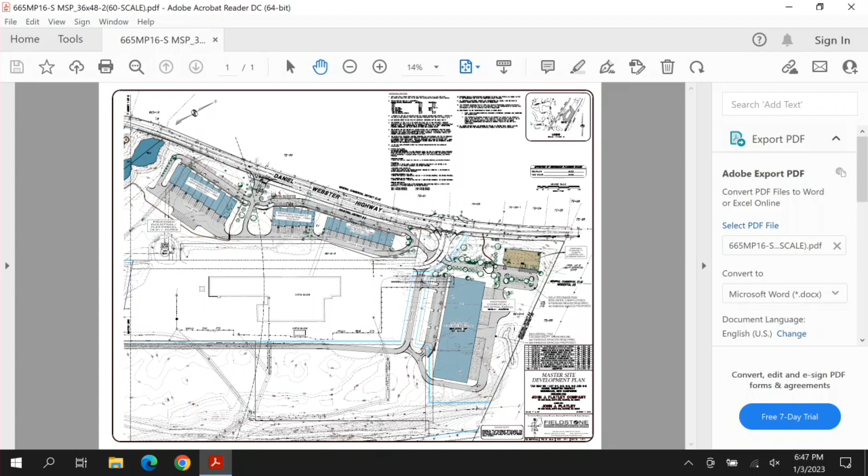You said he's comparing it to what was originally approved back in 2014, correct? Correct. So his new numbers, does that account for the extra apartment buildings that were placed? Yes. So there's slightly more apartments, but there's quite a bit less retail, and a drop off in industrial space. So what you're basically saying is that the increase in residential does not make up for the loss in commercial, traffic-wise. Right. Okay.

Mr. Chairman, I'm a little confused by the packet we were given, which talks about the big retail, and I got a little confused by what we were presented here. So what page are you looking at? Well, just this page for one. Gotcha.

So just from what I'm gathering there, that's just the overall—I hate to call it a secondary site—the second phase. You see Gilbert Drive right south of that. So the yellow portion right there is the phase 2 side of what we're looking at. So what would have been the retail, and I believe the high bay garages and light industrial, included in that parcel as well, correct?

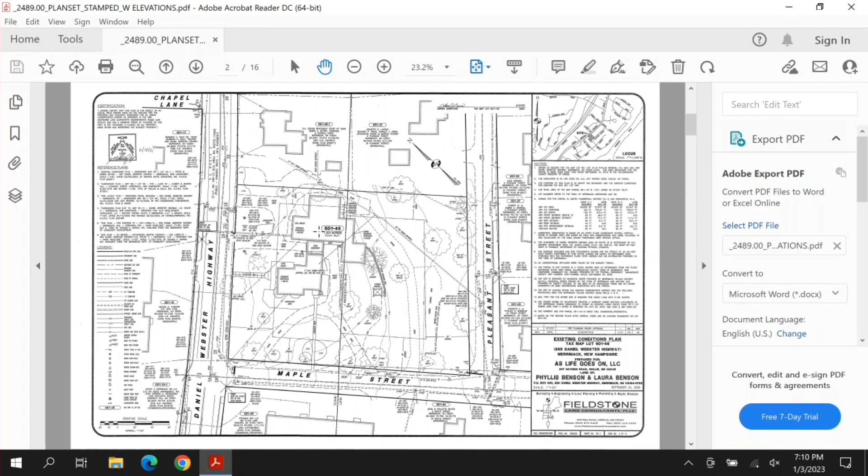So working out the existing elevations of this main building, the original building, and the elevator, and this new building, the elevations didn't work out, and the building was decrepit, so they found it more financially suitable to just raze this portion and build a new facility.

So that's just a demolition plan. This is what we're looking at here. You can see there's much more space along this, I guess, northeasterly boundary. And this little encroachment, because there's a zone line here, and the setbacks change when you get on this side of the zone line, so we have this little encroachment here.

So this is what would be reworked. We just step the building in to get out of that setback. So then the elevator tower is here in the middle where it always was, and there's actually a little atrium in the middle here. On the ground, this is open to the ground, and there's a catwalk that loops around, above grade. The rest of the site is pretty much the same.

There was a little rework to this driveway. This front parking lot is the same. The little loop drive where they used to have valet parking stays, and that's just for bringing an ambulance in to bring people in. But most of the activity's going to be happening over here, and this drive is just a service drive, and the dumpster's back here. There's a man door off the backside connected to this service drive that wasn't there before — there were doors there, but they weren't shown as connected with a walkway. There's a new walkway here that connects to the new building that wasn't there before.

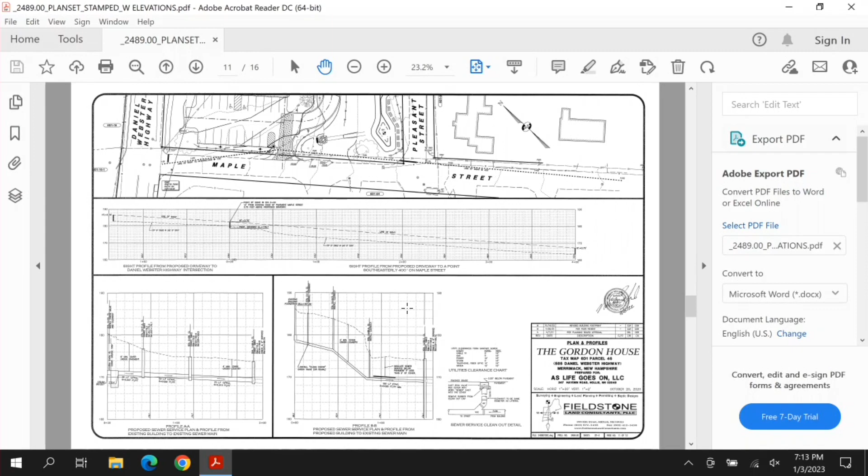We can skip down. I do have an elevation of the plan. Not to cut you off, Mr. Chamberlain, but could you return to the landscaping? Since you're razing that portion of the building that's currently encroaching on the next property, are you not going to replace any vegetation where the building once stood?

Well, that'll be all loamed and seeded. We can certainly add some plantings over there as well. I'm assuming you're going to make the new portion of the building look similar to the original, somewhat Victorian. Yeah, it'll be all clapboard. That's okay, continue.

We didn't get any pictures of what those look like in our packet. Do we not have any elevation? I thought there were some, let me find them. The elevations were submitted. I can flip to them here. We only have the elevation from the street. That's one of the comments, to include those with the plan set, which we certainly will do.

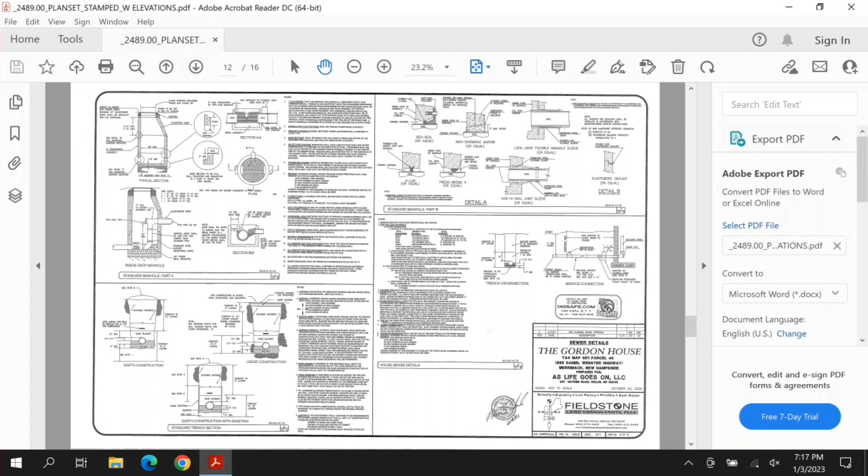Did you have a staff or break room? Yeah, over there, in the original building. Okay, gotcha. I mean, there's no bedrooms proposed in the original building.

Did you have to go through the Conservation Commission, the Historical Society, for any of this construction? I would assume so, since you're razing it. I don't think we've gone through that process yet.

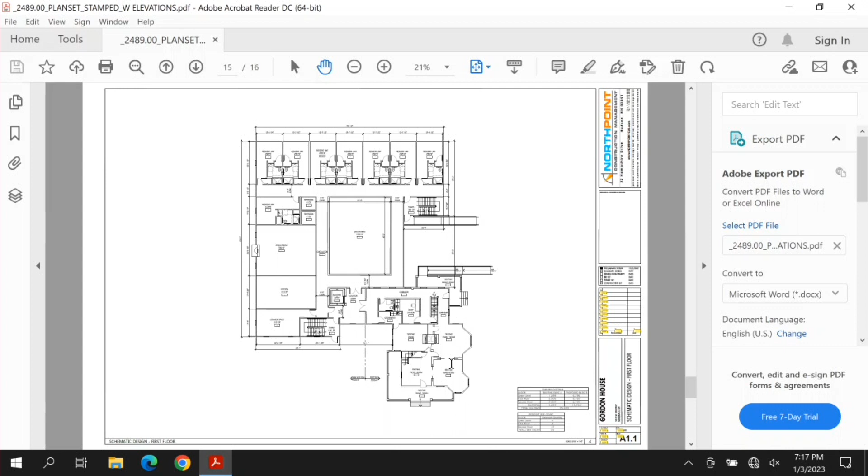So you'll be going to them after us? Yeah. Robert, is that how it usually goes? The Historical Society doesn't see it till we approve it. We don't have any requirements for that in Merrimack, so it's strictly voluntary. As a member of the Historical Commission, I didn't know that - the commission is supposed to be notified if a historical building is being razed in any part. They just have to notify you, and we like to see what they're actually going to do and what the plan is. I don't know what qualifies as historic, but that portion was built in the 70s.

I'm assuming the restaurant portion is relatively newer compared to the rest of the building. I'm surprised that's the portion you have to tear down, considering the house has been there for a while. I don't think it was maintained. Well, it's been sitting there for a long time, as long as I can remember.

So, Mr. Anketell, please. Miss Healy, so this is assisted living, so they're more or less independent with their ADLs, et cetera. And you don't have any staff desk, documentation area, et cetera, over in the part that's going to be rebuilt? It's all in the existing building? Correct, I mean there is some.

As a nurse, I find that very interesting - inconvenient, you might say. That too, my wife would say the same thing. I don't know a lot of detail about the building. They do have some common area with the new portion, but most of the operations are occurring in the old building. Well, I'm sure a lot of that's computerized now, at least at my wife's job. It's attached to the nursing cart anyways.

So the way the staff memo was written, we need a variance for this plan to move forward. And what we understood is we've talked to the owner, the applicant, and the architect, and they said they can modify the building, so a variance wouldn't be required. So I guess it's either-or - either we get a variance or we modify the building. You could approve this with the condition we get a variance, or that we modify the building.

Well, the part I don't care for is that modifying the building slightly affects the interior layout of the whole thing, and may require an extension somewhere else. So if you're here tonight to ask us for approval of this particular configuration, we can act on that, or we can do it with the condition suggested by staff. But I'm not ready to go to any approvals. Well, if you need to change it, we're okay with that, without seeing it. That's where I'm coming from.

I didn't get the visuals, just a quick look while it was up, then it's gone. So I don't know what this is going to look like - the architecturals, yeah, and I guess that looks pretty good. Is there a chimney on the north side there? Is that what I see sticking up? That's what it appears to be. That's it, whether it is or it isn't - it appears that way to me too, but is that what it is?

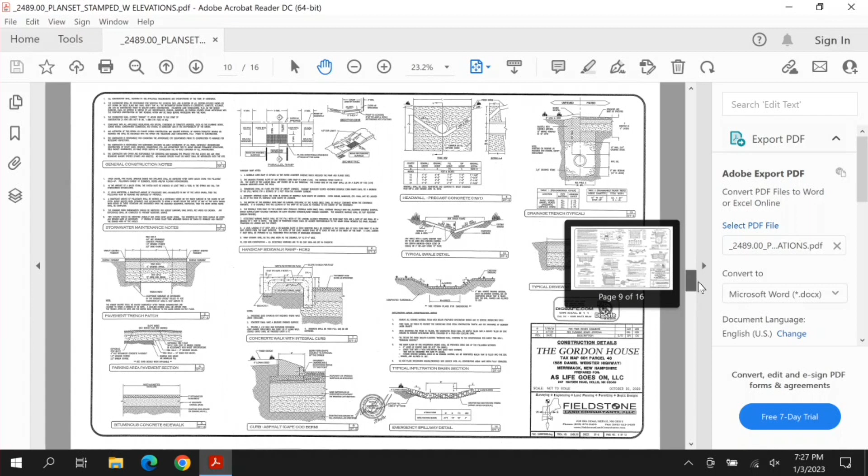Do you have a rendering of what it looks like? Correct, we don't have the rendering - I only have the rendering facing Daniel Webster. I apologize for that. I'm not sure why the architect didn't give us a rendering of each.

But yeah, so they're going to have to come and use that sidewalk in the front and bring them around. That's definitely something I will get clarification on. I almost think the horseshoe has no utility at that point. No, I agree.

Yeah, it seems like it wouldn't work. If I had an ambulance, you'd just pull up front. Unless you're going to use it for parking visitors or something. Yeah, it's already there. But if you made the barn door like a person loading dock, then it would make more sense.

I'm just not sure how it's gonna work, because the basement level is well below. You're coming in mid-level there, not more above, just do a mid-level scissor lift, you're coming in a little below. Get real industrial real quick, yeah.

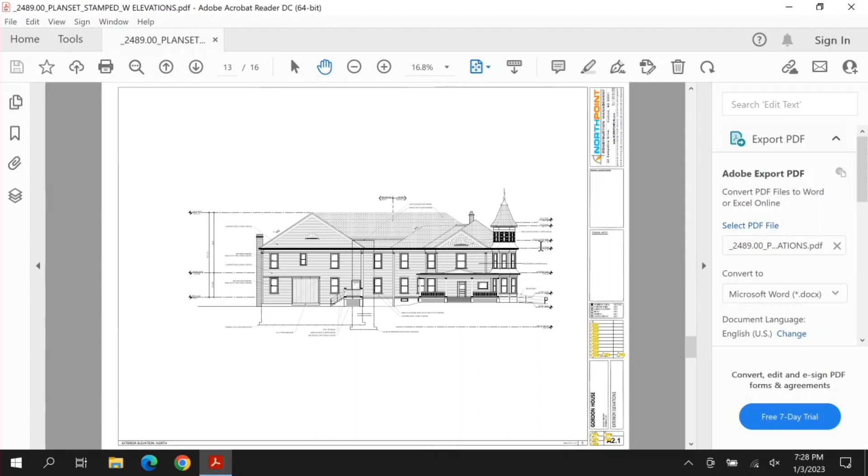A lot of people in assisted living bring some of their own furniture, so you'd need a space to be able to get through that door. Well, it doesn't look like that door will serve the purpose. I'm not sure how this works.

So offhand, I'd say, Mr. Chairman, that we need a little more detail on that whole thing, and whether or not - let me see - the site and the planting. Okay, I guess those were my main comments. Nelson, you make a good point, those are good points. I must have misunderstood that the setback - to me it looks like it changed, because at the back of the building you said you're going to have a notch. I did not notice that.

Robert, I'm assuming, like you said, that Tim worked on this one. Is there a reason he'd be okay with us pushing that forward without these even being the plans they're actually going to build? So because it's such a minor modification, you can conditionally approve it with the condition that the design be presented to staff, that that's acceptable to us. If the board does not feel comfortable with that approach and wants to see it again, to see the cutout and see everything, that is perfectly fine.

Okay, I think I'd like to see what it's gonna be before I say go ahead with it. I'd also like to see a rendering of more than one side as well - not to be a pain, but some measurements too. How big is this? Is that 40 feet? Is that 60 feet? I'm not sure if that's even our jurisdiction, but having that horseshoe not be functional just does not make sense to me.

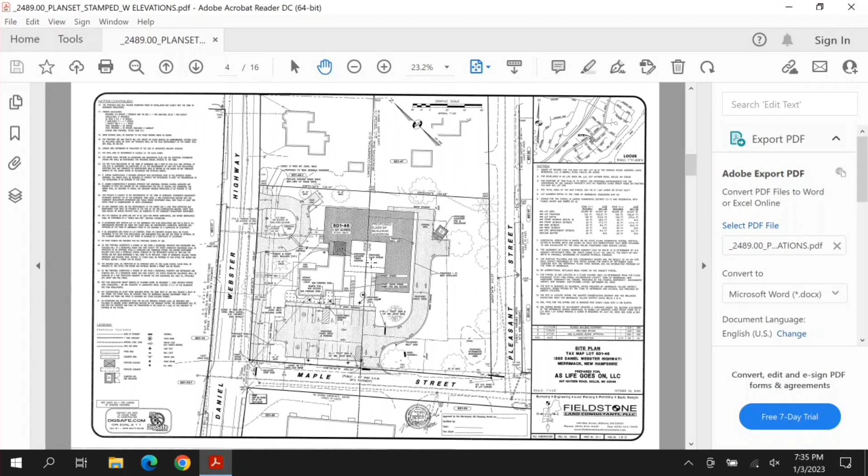I think we'd like more detail on that. Should we continue this? We're coming back, yeah, I think that's what's going to happen. It's up to the members, board members, if you don't have any other questions, let us know how you'd like to proceed. There's plenty of room on the site to add a patio at a later time down in this area, all kinds of outside area there.

Mr. Chair, may I suggest public comment? Yes, you may, and I'll take that suggestion. Thank you, Robert. Looking at the time, it's 7:35. I'd like to open up the public comment section. Any members of the public that wish to step forward and speak on this matter, please do so now.

If you'd like to step up to the microphone, sir, introduce yourself, tell us your name, address, and tell us what you have. My name is Robert Stengel. I reside at 3 Pleasant Street with my wife Deborah. My dining room window will be facing that dumpster. I'm sorry, could you repeat which window? My dining room window will be facing the dumpster dead on.

I think it's great that this building is going to be used, period. But I have a couple of questions because I've been there for 37 years. Levi Lowles was there when we first moved in. Their dumpster was almost right on the back lot line.

First, let me start with the loading area lighting. I noticed the lighting diagram shows the lighting isn't out a lot as far as the lines go. I just don't want to see any lighting shining directly at my house. It showed zero at the lot line, I did check that. But the illumination lines show it's going to be relatively minimal, darker towards the edges. I just want to make sure that doesn't happen. I don't have these huge outdoor floodlights on my house.

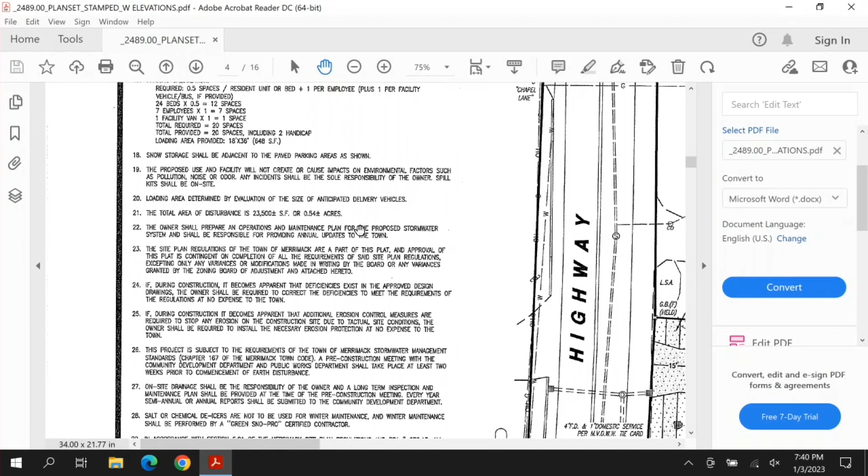Can you put it back where it used to be? If it's not on there, we can add a note that it can only be emptied at certain hours. Well, I'm assuming the surrounding residents wouldn't want it back where it used to be - I would assume they'd want it moved in.

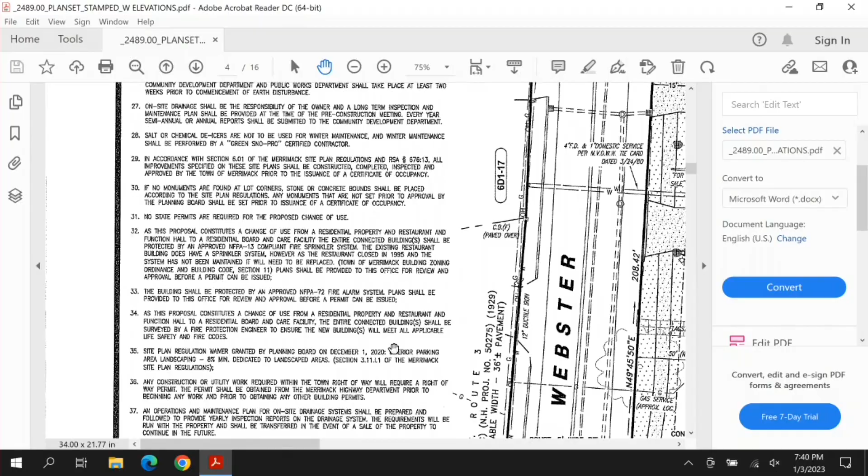Okay, well this resident wants it out of here, doesn't like it here, and so he's looking at it. Now, you can screen it if you properly screen it. Yeah, I mean, it just says enclosure - as long as there's something around it you can't see through. Where it is in the enclosure is fine. I'm just concerned about the odor.

Thank you, sir. Go ahead - where it is, you mean where it is on this plan or on Levi Lowell's plan? Well, Levi Lowell's isn't there anymore. Yeah, but where's the dumpster? On this plan, it's fine, where it currently is. It's already moved, just want to make sure which plan we're going by. Down in this corner, it comes out down, right about there. And where are you? You're over here? Yep.

So we've been told, for the people at home since he doesn't have a microphone, that the old Levi Lowell's dumpster was almost on the property line on Pleasant Street. On this plan, it's moved in closer towards the building, which I'm surprised it was that far away.

That was all a gravel parking area. And there was valet parking, so you'd pull into the horseshoe and they'd drive around and park, sandwiching them in, just kind of packing them in. That was my understanding, before my time, actually, as I never went there.

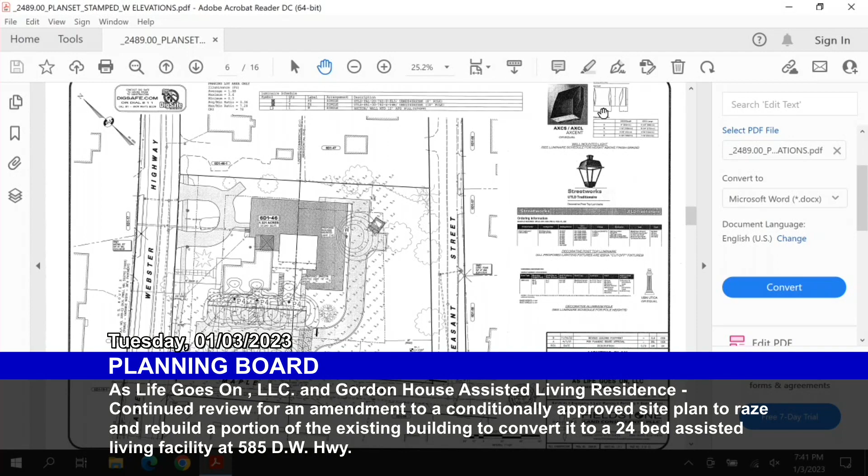As far as the lighting, it is shielded and downcast. I do see that the measurements are showing 0, 0, distance from the property lot line. This is the type of fixture, so it's shielded and it's not shining out.

When the time comes, we can always add a condition for dumpster pickups and drop-offs. As Nelson said, that's how we have handled it in the past.

Now, Barbara had raised a question about the sidewalk, and I wanted to point out, Barbara, on page 5 of the plan set, along Daniel Webster Highway, it's clearly shown that it's a 5-foot bituminous concrete sidewalk going the length of the property.

Do we require one on Maple Street? That was the question, since it abuts 2 roads. No, there's no sidewalk requirement. It's optional to require sidewalks under the site plan regs.

We could require it if we wanted, that would be up to the board's discretion, correct? It would be a length of sidewalk, and it does not connect to any other sidewalk, I just point that out.

Gotta start somewhere. It is right across the street from Shaw's, though, Nelson. Okay, I'll vote for it if you will. There I don't like to do that, but I know. I'll do at least on DW.

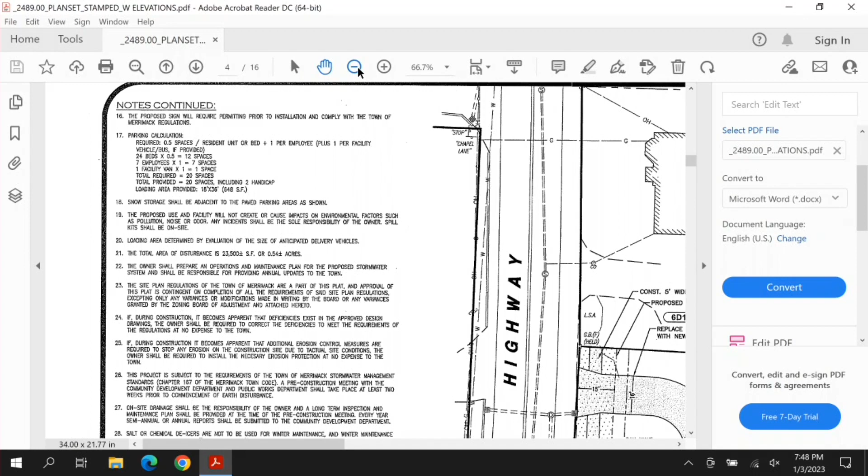I hate to see parking signs everywhere - no parking signs everywhere. But based on what this gentleman has brought up with the overflow parking, is there a way we can designate any other areas for that, whereas they already meet the requirement? Or I hate to say, well, put up some no parking signs, because they just look terrible.

They look terrible, but I suppose it would be their problem to deal with if they had too many cars coming in. I would hate to see people lined up during the holiday seasons or popular visiting times lined up on the street, because right now they don't have a sidewalk on Maple Street. But how do you even access the property if you do have to park there, walk across the grass? Well, you're going to be walking on the sidewalk we'd like to see in the plan, if that comes to it.

But there is really no way to prevent that other than to require more parking, but they already meet their requirement - that's what it comes down to. If that's what our regulation says, we don't really have any authority to make them go beyond the regulations of already calculated spots.

I know what Bob would say - he would hate to have them build parking for 2 or 3 days of the year that you're going to use, build parking lots for. I'd rather see it be green space than parking lots. I would agree with him. I mean, they meet our ordinance, so that's the ordinance.